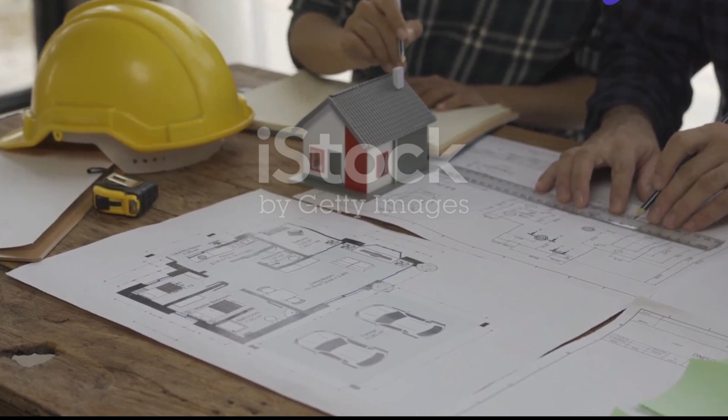Planning, the blueprint for success. You wouldn't build a house without a blueprint, right? The same goes for rebuilding a community, a city, or even an entire country. Reconstruction requires a solid plan. We're talking clear goals, timelines, and a shared understanding of what needs to be done.

First things first, we need to figure out what we're building. What are the priorities? Housing, hospitals, schools? We need to listen to the people who call this place home. They know what's needed most.

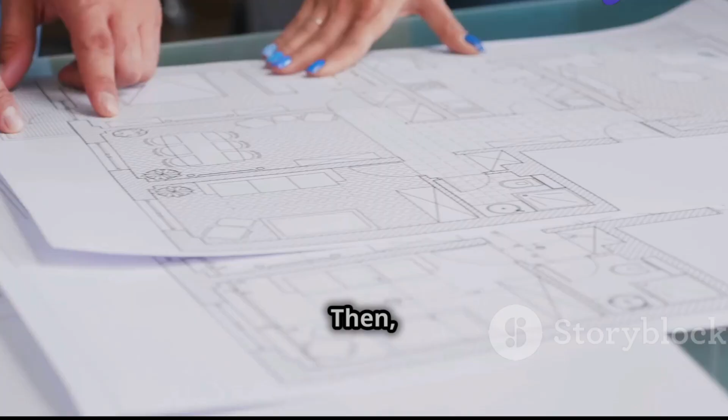Then the engineers and architects step in, creating detailed plans. These aren't just pretty pictures, folks. These blueprints are the foundation for everything that comes next.

And we can't forget the what-ifs. What if a hurricane hits during construction, or if the cost of materials skyrockets? A good plan addresses these risks head-on, so we're not caught off guard. Remember, failing to plan is planning to fail.

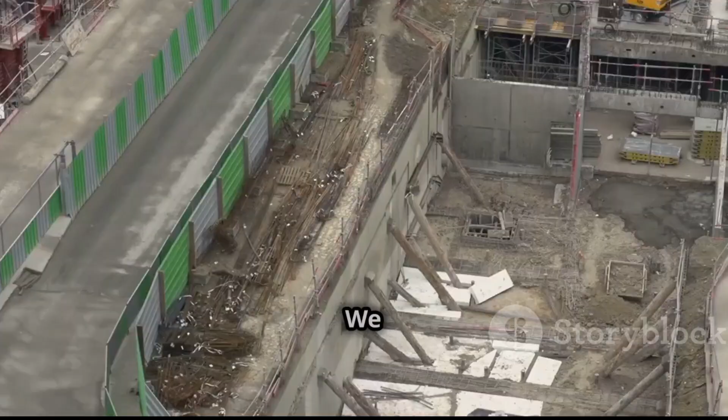Funding, fueling the engine of reconstruction. Okay, we have our plan. Now let's talk money. Reconstruction isn't cheap. We need materials, equipment, and skilled workers, and that's where funding comes in. Think of it as the fuel that keeps the reconstruction engine running.

Where does this fuel come from? Well, it can be a mix of sources. Governments often allocate money from their budgets for disaster relief and reconstruction. International organizations like the World Bank also contribute through loans and grants. And let's not forget private investors who see an opportunity to be part of something bigger.

Each funding source comes with its own set of rules and expectations. Government money might come with conditions like using local contractors, and international loans often have repayment deadlines. Private investors want to see a return on their investment. It's a balancing act, folks.

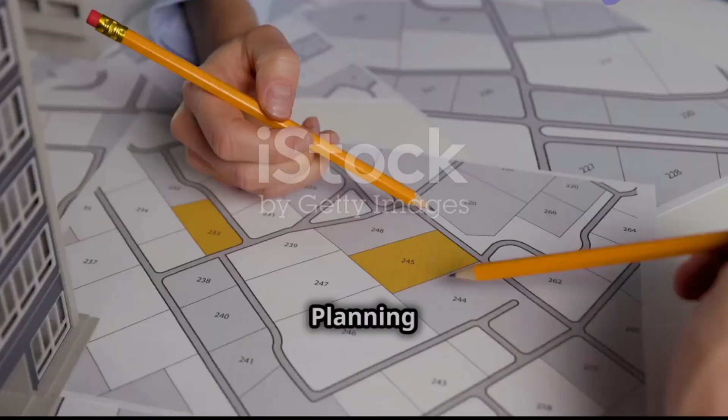Implementation. Teamwork makes the dream work. Planning and funding are crucial, but they're just the beginning. The real work begins with implementation. This is where the rubber meets the road, where all those plans and blueprints become reality.

Reconstruction is a team effort. We're talking engineers, construction workers, project managers, community members, all working together towards a common goal. Communication is key, folks. Everyone needs to be on the same page.

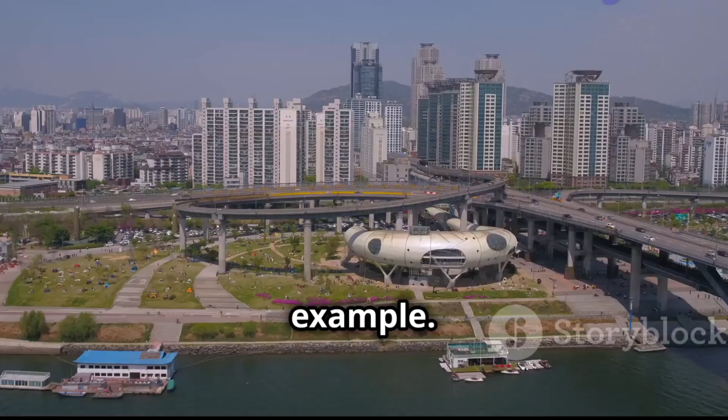Let's take South Korea after the Korean War as an example. The country was devastated, but they rebuilt stronger than ever. How? By working together. They had a clear plan, they secured the necessary funding, and most importantly, they had people willing to put in the work and get the job done.

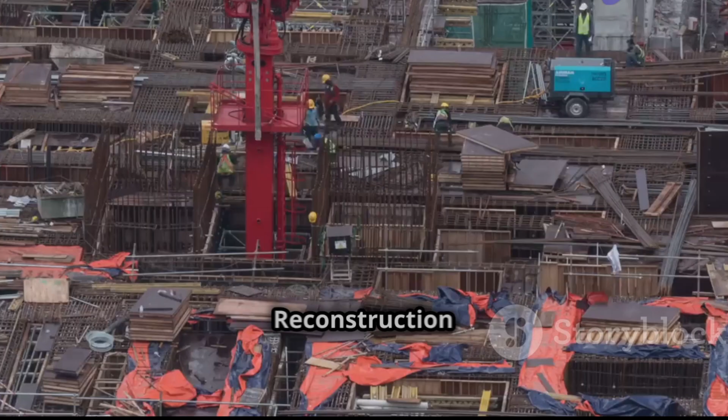Learning from the past, building the future. Reconstruction isn't a one-size-fits-all process. Every project has its own unique challenges and opportunities, but there's always something to be learned from the past. By studying successful reconstruction efforts, we can identify best practices and avoid common mistakes.

And as technology advances, so does our ability to rebuild smarter and more efficiently. Imagine drones delivering materials to remote construction sites, or 3D printers creating entire houses in a matter of days. The future of reconstruction is full of possibilities.

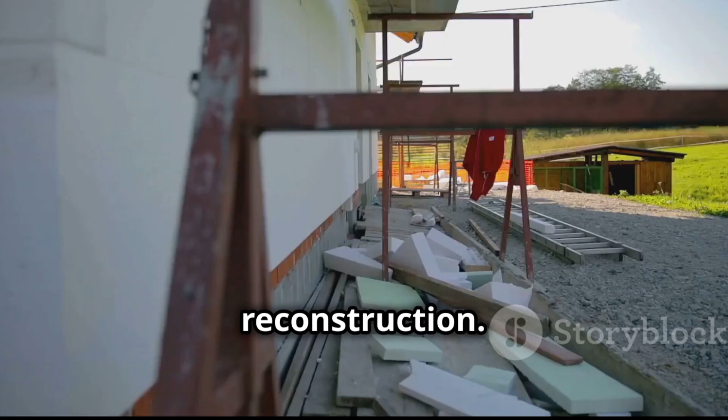But no matter how advanced our tools become, the human element will always be at the heart of reconstruction. It's not just about bricks and mortar, folks. It's about rebuilding lives, communities, and hope for a brighter future.